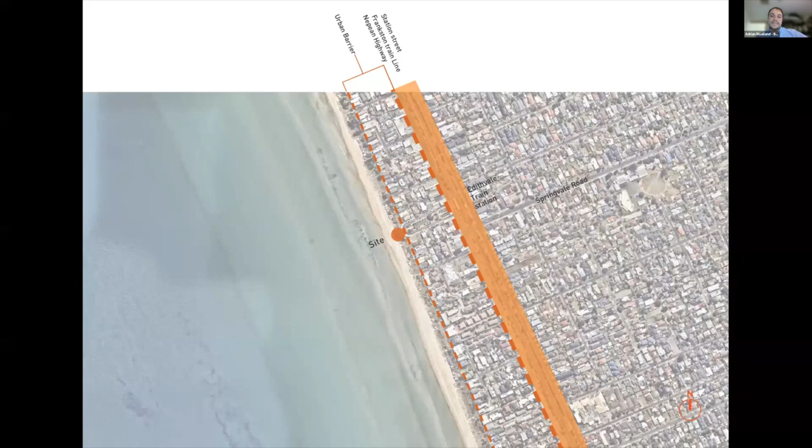A closer view of the site shows that the beach views are for those who can afford the luxury. The densification of the urban fabric is also responsible for limited parking, making pedestrian access the predominant beachgoer. Accessing the beach through Beeson Reserve, after getting off the train at Edithvale, over 25,000 people visit the beach every summer, the majority of them on foot.

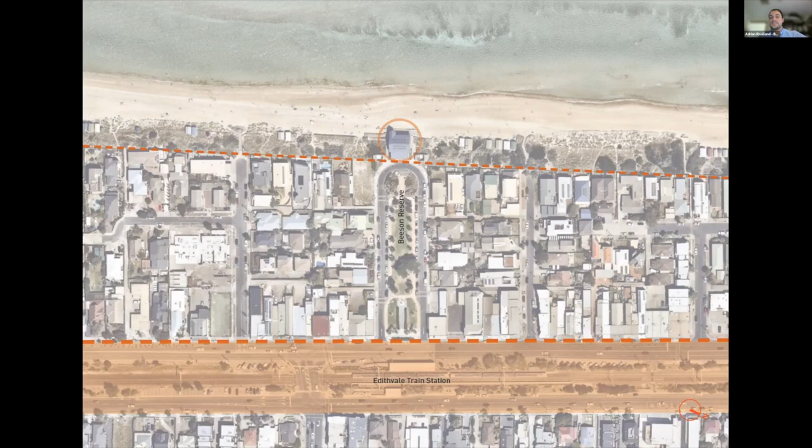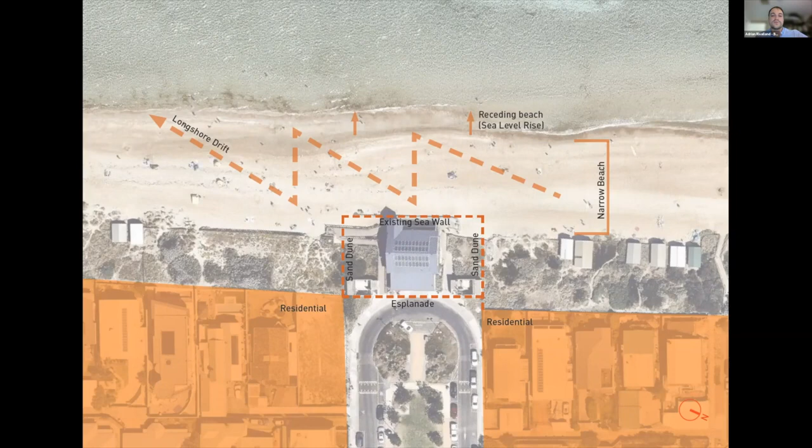The seawall, the sand dune, the esplanade and the suburb define the four sides of the site. Environmental conditions and sand redistribution due to longshore drift and erosion mean the site is forever changing. The existing building is a visual and physical barrier, providing very tight, inappropriate access, and was an obstacle to getting down to the beach.

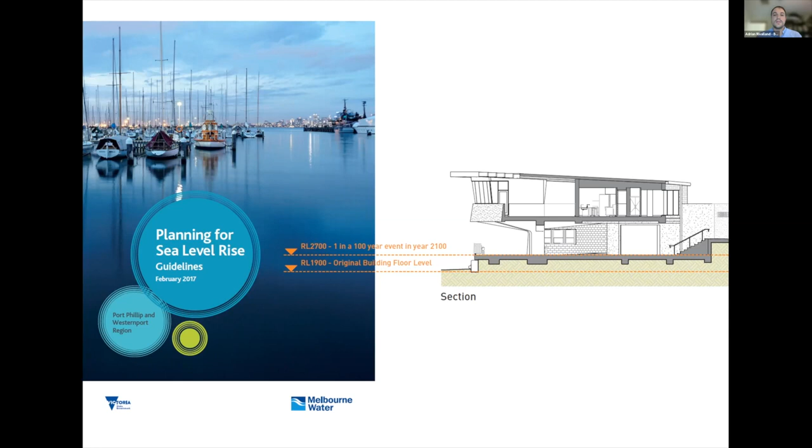Edithvale is one of the narrowest beaches on the bay and will be significantly impacted by sea level rise. The new building has been lifted 800 millimetres to contend with predicted sea level rise for the year 2100. Already the existing seawall at the front of the building has water lapping at its base during king tide events.

Accessibility to the beach is the focus for the design. Two ramps from the concourse were provided to mediate the elevated ground floor and current beach levels. Ramps and concourse are an extension of the beach, coloured to mirror the sand and designed to allow sand to creep up the ramp, enticing people to make the walk down to the water.

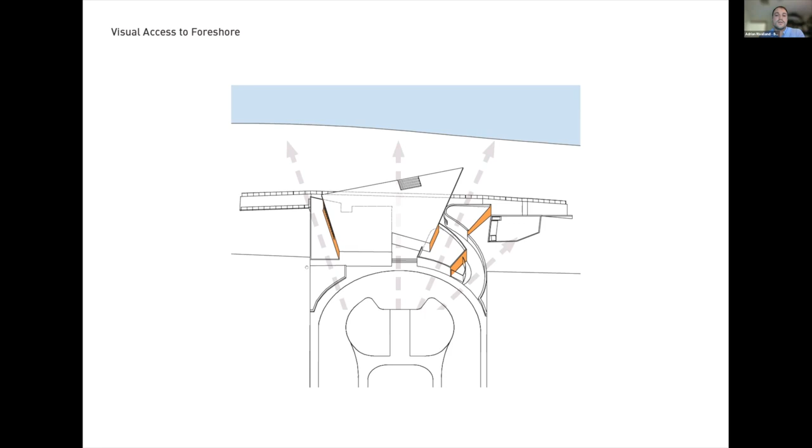Given the predominant visitor to the beach makes the trek from the train station, it was important for us to sculpt the building to provide views to their destination and promote intuitive wayfinding for people regardless of diversity. The first floor is set back and bridges over the ground floor, creating beach views to the side and through the middle of the building.

The pedestrian access ramp to the north marks the beginning of the beach experience as it draws you down. Sand-coloured concrete indicates you've already arrived, and the views to the beach let you pick your spot on the sand before you get there.

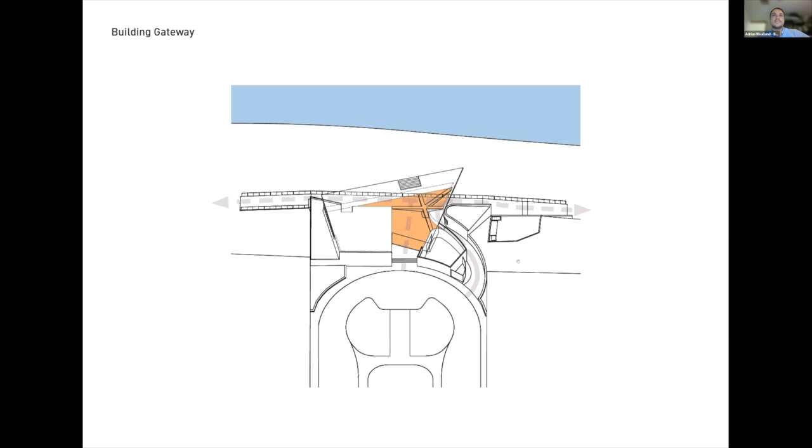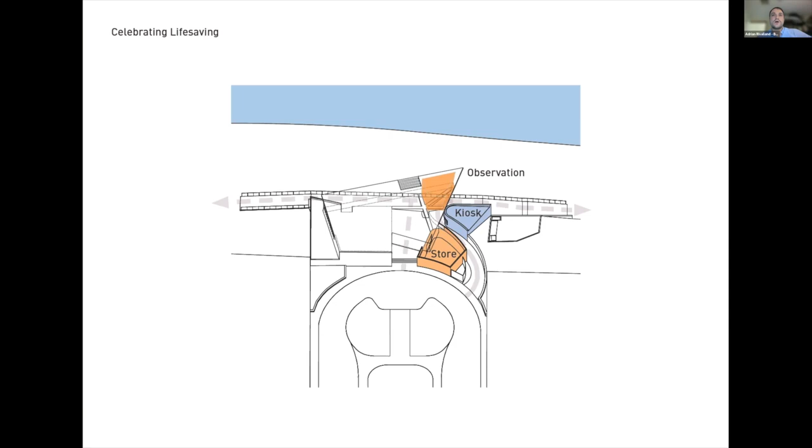It was important for us to celebrate the club through the lifeguards on duty. The observation room is cantilevered over the concourse from a central column, giving the lifeguards a prominent position in the building.

The elevated first floor covers the concourse and allows people to meander to the shore, providing shelter and the ability to enjoy the beach without facing the harsh sun.

The kiosk is unique along the foreshore and provides a meeting place for people. Located on a concourse at an elevated position, it lets you enjoy a coffee and a sandwich without getting your feet wet.

The column supporting the observation room, with its tapering beam, is like a rock and a stream of water. It's the only column in the concourse, and people move around it and interact with it without realizing. The observation room sits on top of this column, cantilevering over the concourse, letting people know there are lifeguards on duty, keeping them safe.

We noted that the reserve accurately reflected the proportions of a long seafaring vessel, such as a cruise ship, with the station at the stern and building at the bow. We use the geometry of these vessels to assist with generating the forms of the building.

The bow cantilevers over the pedestrian space and provides the elevated platform required to observe. The lineal balustrade is slightly tapered to reflect the forward tilt of the observation room glazing and mirror the linearity of the hull of a ship.

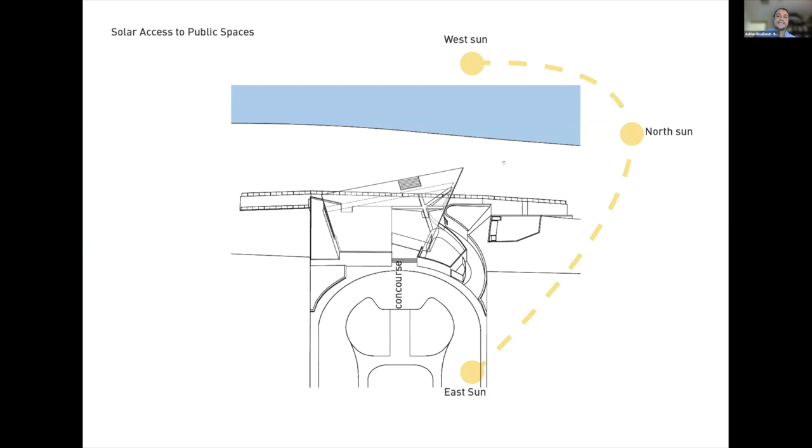As we lifted the building, we needed to consider the solar access to the concourse. The public interacts with the shadows, trying to stay as covered as possible when ordering from the kiosk. The kiosk owner is forever reshuffling his outdoor furniture, trying to make as much use of the shadow as possible. If you're there long enough, you'll see the outdoor furniture creeping further into the concourse as the day gets later.

The afternoon sun penetrates the full width of the concourse, creating playful shadows as the day goes on.

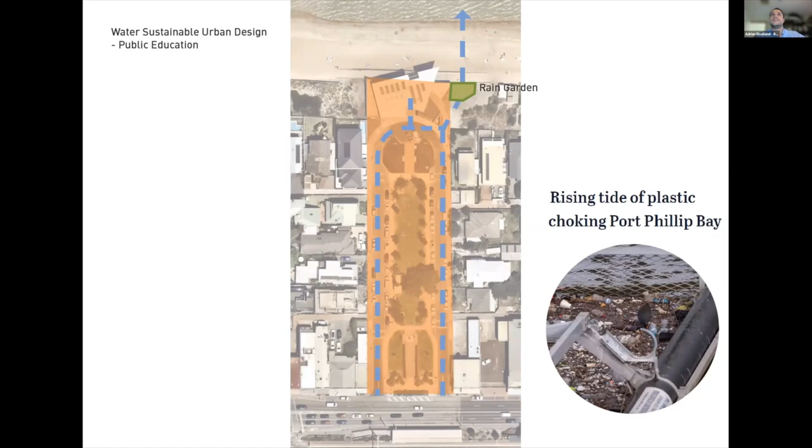One aspect of the project that we're incredibly proud of is its approach to water-sensitive urban design. The esplanade, the reserve, and the building all have their stormwater captured and filtered through a rain garden before it is dispersed into the sea.

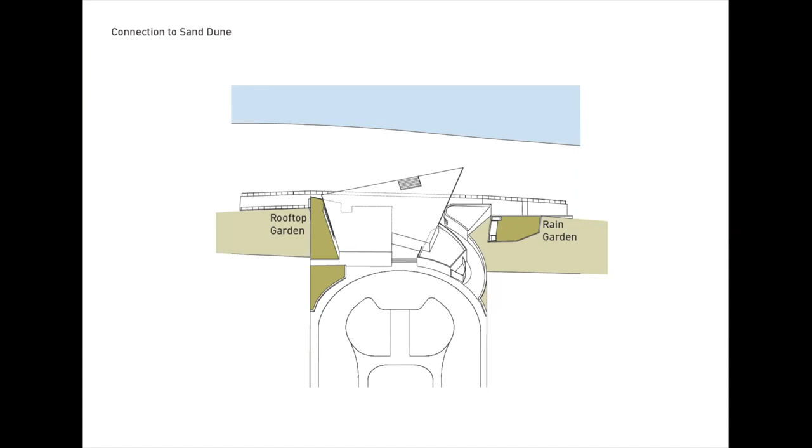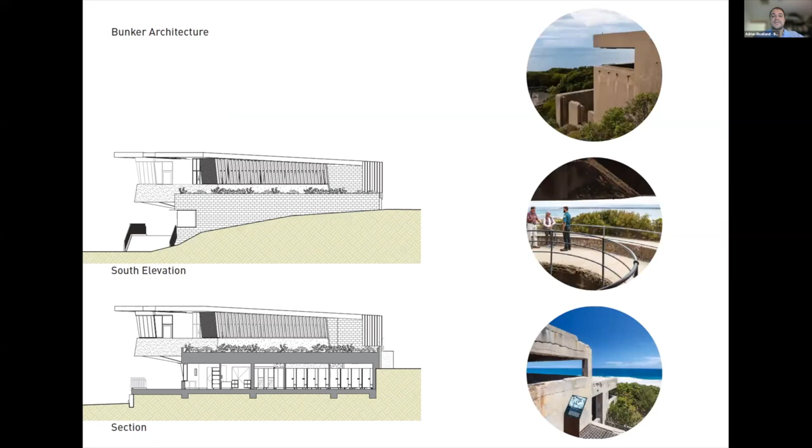The building is positioned to be partially submerged in the sand. This was required to mediate between the levels of the elevated esplanade and the beach. We looked to Fort Nepean to assist with integrating the buildings into the landscape, as partially submerged bunkers have the same basic function of observing the water.

The patrol room on the south of the building has a slotted window through a masonry shell. The kiosk is treated the same way, and both these flank the building at the north and south ends of the pedestrian ramps.

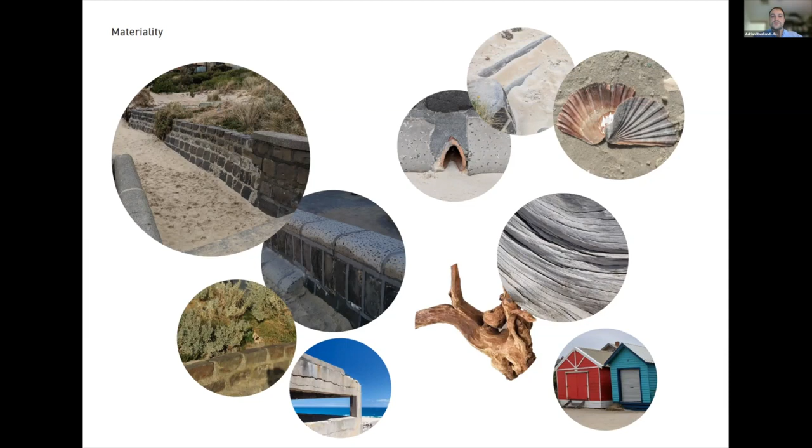Masonry elements are used to anchor the building to the site, along with concrete and bluestone. Timber is used to help the building age in place. The intention is that with each passing season, the building will have subtly changed as a reflection of the environment it's exposed to.

These images taken last week show that timber is graying where it's more exposed, concrete showing signs of weathering where it faces different surfaces, the dune slightly taking over, and the sand dune creeping up the paths.

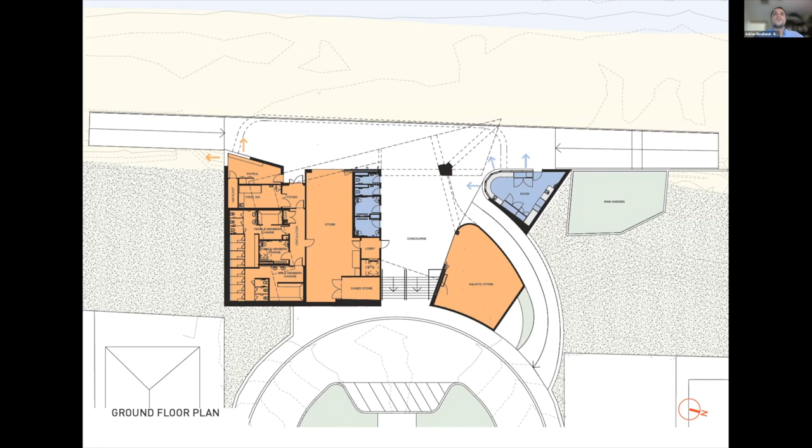At the ground floor, the public areas are noted in blue, and the club areas are noted in orange, with the concourse running through the center of the space. The first floor is accessed through a foyer, and then up the stairs to the training room and social room.